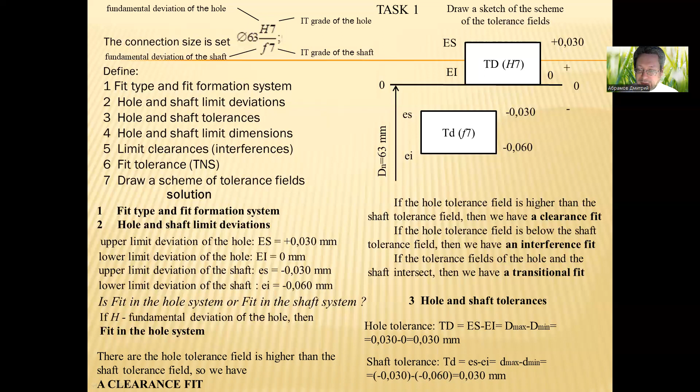Hole and shaft tolerances. Hole tolerance, big TD, equals upper limit deviation minus lower limit deviation of the hole: 0.03 minus 0 equals 0.03 millimeters. Shaft tolerance, TD small, equals upper limit deviation of the shaft minus lower limit deviation of the shaft: minus 0.03 minus minus 0.06, equals 0.03 millimeters.

For hole and shaft limit dimensions: maximum hole size, D maximum, equals nominal diameter plus upper limit deviation of the hole: 63 plus 0.03 equals 63.03 millimeters. Minimum hole size equals nominal diameter plus lower limit deviation of the hole: 63 plus 0 equals 63 and 0 millimeters.

Maximum shaft size and minimum shaft size. Maximum shaft size, small d maximum, equals nominal diameter plus upper limit deviation of the shaft: 63 plus minus 0.03 equals 62.97 millimeters. Minimum shaft size, small d minimum, equals nominal diameter plus lower limit deviation: 63 plus minus 0.06 equals 62.94 millimeters.

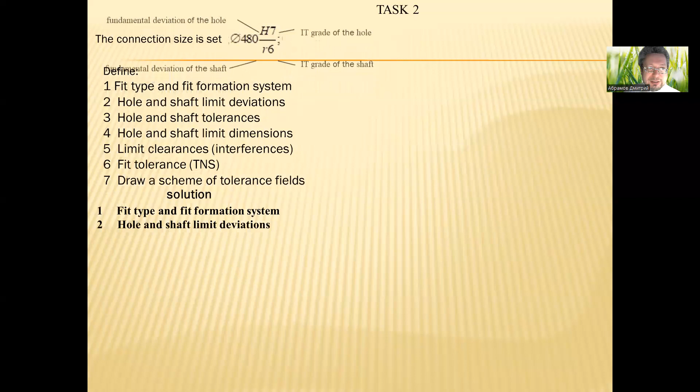We start solution. First, fit type and fit formation system. We have fundamental deviation of the hole, fundamental deviation of the shaft, IT grade of the hole, and IT grade of the shaft. Upper limit deviation of the hole, big ES, is equal plus 0.063 millimeters. Lower limit deviation of the hole, big EI, is equal 0 millimeters.

Upper limit deviation of the shaft, small es, is equal plus 0.172 millimeters. Lower limit deviation of the shaft, small ei, is equal plus 0.132 millimeters.

Is fit in the hole system or fit in the shaft system? If H is the fundamental deviation of the hole, then it's fit in the hole system.

Draw a sketch of the scheme of the tolerance fields. Zero line and nominal diameter is equal 480 millimeters. Tolerance field of the hole H7.

Upper limit deviation and lower limit deviation of the hole, and tolerance field of the shaft. Upper limit deviation of the shaft is bigger than upper limit deviation of the hole, and lower limit deviation of the shaft is bigger than upper limit deviation of the hole.

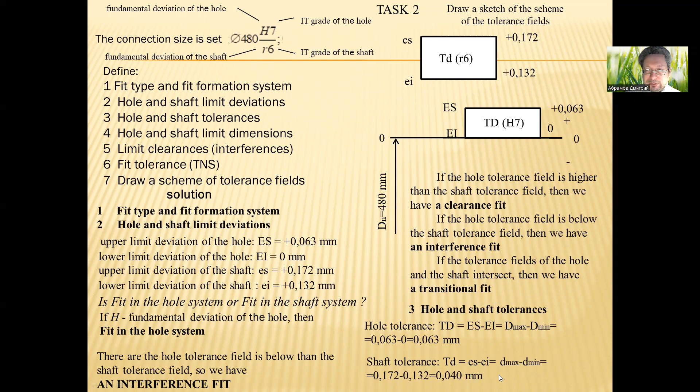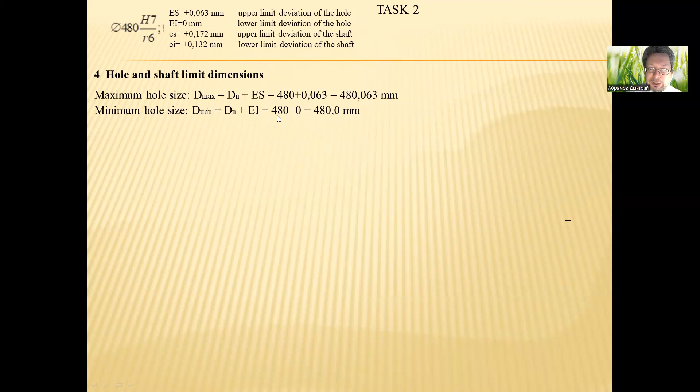We continue task 2. Solution of task 2 for hole and shaft limit dimensions. Maximum hole size, D maximum, is equal to nominal diameter plus upper limit deviation of the hole. Minimum hole size is nominal diameter plus lower limit deviation of the hole. So maximum hole size is equal to 480 plus 0.063, and we have 480.063 millimeters. Minimum hole size is equal to 480 plus 0, which is equal to 480 millimeters.

Maximum shaft size, small d suffix maximum, is equal to nominal diameter plus upper limit deviation of the shaft. It's equal to 480 plus 0.172, so we have 480.172 millimeters. Minimum shaft size, d suffix minimum, is nominal diameter plus lower limit deviation of the shaft: 480 plus 0.132, so we have 480.132 millimeters.

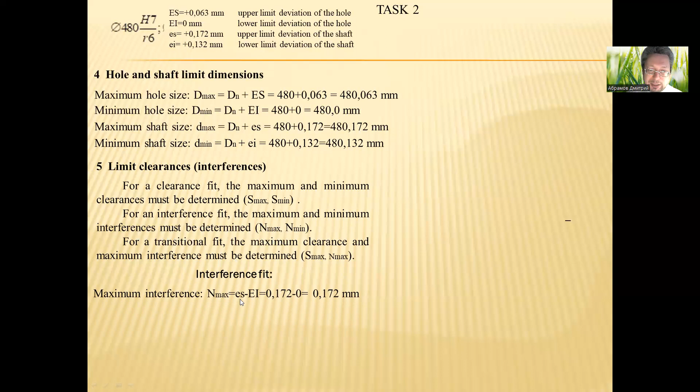Limit clearances or interferences. We have interference fit. For an interference fit, the maximum and minimum interferences must be determined. Maximum interference is equal to upper limit deviation of the shaft minus lower limit deviation of the hole, and we have 0.172 minus 0, which is equal to 0.172 millimeters.

Minimum interference: we have lower limit deviation of the shaft minus upper limit deviation of the hole, which is equal to 0.132 minus 0.063, equal to 0.069 millimeters. Fit tolerance is the sum of the tolerance field of the hole and tolerance field of the shaft, big TD plus TD small, and we have 0.063 plus 0.040, which equals 0.103 millimeters.

Draw a scheme of tolerance fields. Zero line, nominal diameter of connection is 480 millimeters. Tolerance field of the hole, tolerance field of the shaft, upper limit deviation of the shaft, lower limit deviation of the shaft, upper limit deviation of the hole, lower limit deviation of the hole. R6 is the tolerance field of the shaft, and H7 is the tolerance field of the hole.

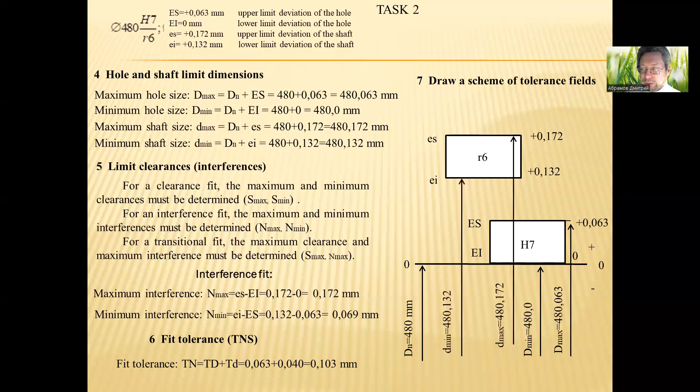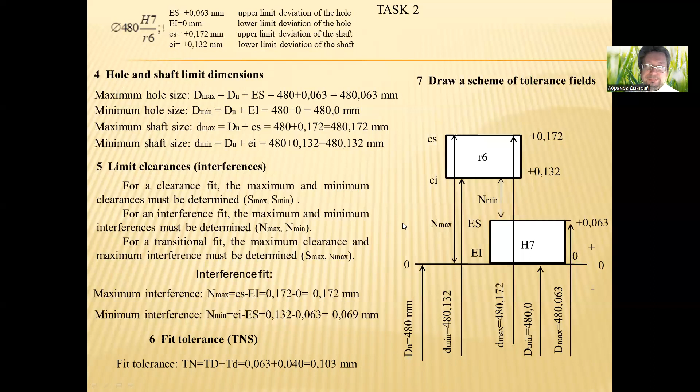Limit dimensions of the hole, limit dimensions of the shaft, and maximum interference and minimum interference in the fit. It was solution of task number 2.

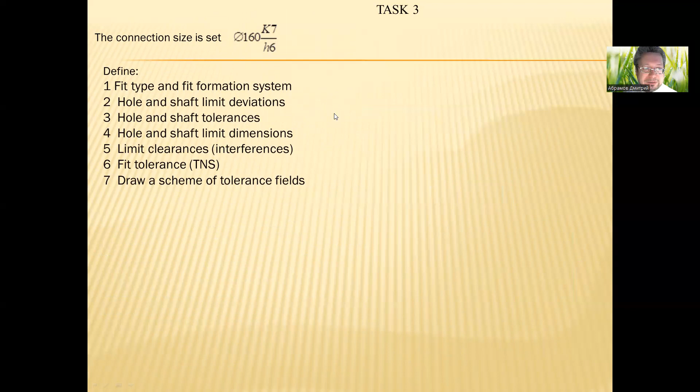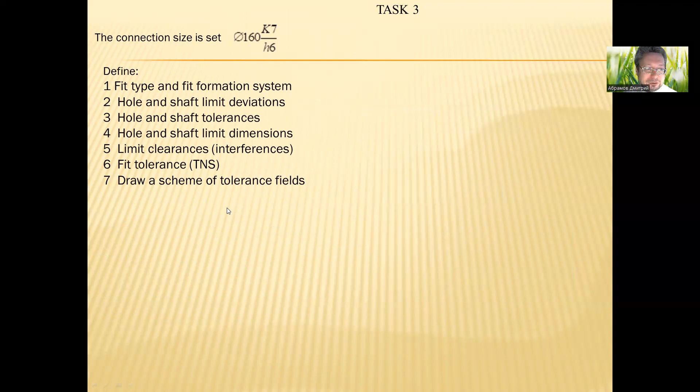Task number 3. The connection size is set: nominal diameter 160 millimeters, K7, line H6. Define fit type and fit formation system, hole and shaft limit deviations, hole and shaft tolerances, hole and shaft limit dimensions, limit clearances, interferences, fit tolerance, and draw a scheme of tolerance fields.

We start solution. First, fit type and fit formation system, hole and shaft limit deviations. Fundamental deviation of the hole K, IT grade of the hole 7, fundamental deviation of the shaft H, small h, and IT grade of the shaft 6.

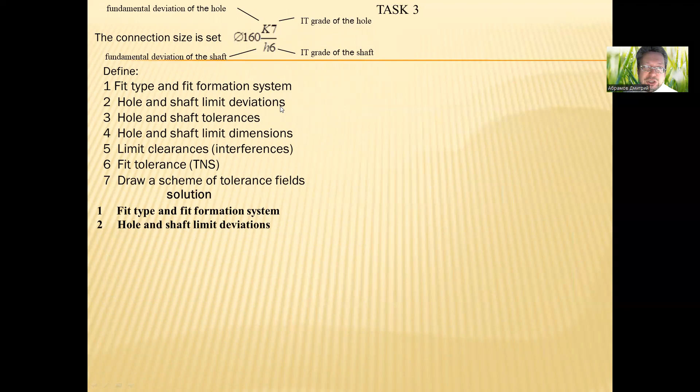We find upper limit deviation of the hole, big ES, is equal plus 0.012 millimeters. Lower limit deviation of the hole, big EI, is equal minus 0.028 millimeters. Upper limit deviation of the shaft, small es, is equal 0, and lower limit deviation of the shaft, small ei, is equal minus 0.025 millimeters. Is fit in the hole system or fit in the shaft system?

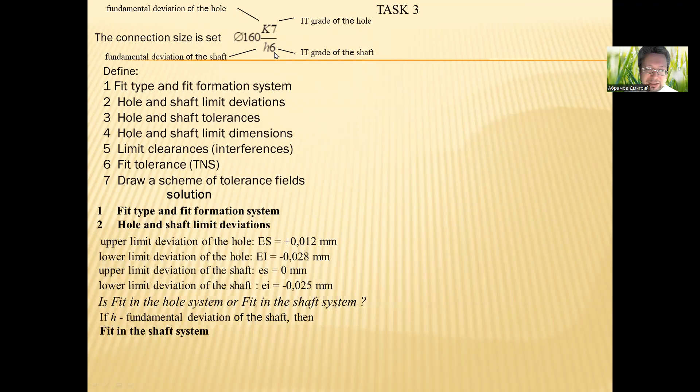If H is fundamental deviation of the shaft, then fit in the shaft system. We have H fundamental deviation of the shaft, so we have fit in the shaft system.

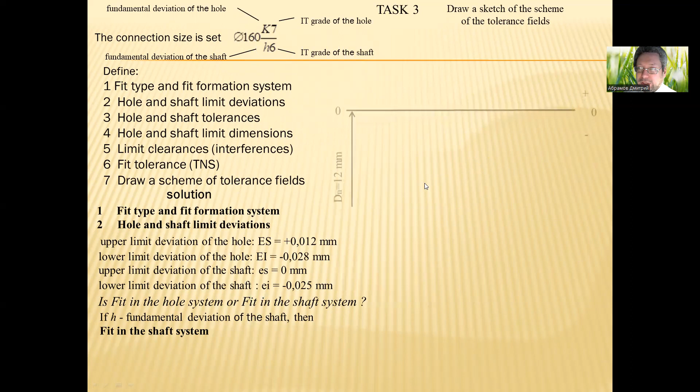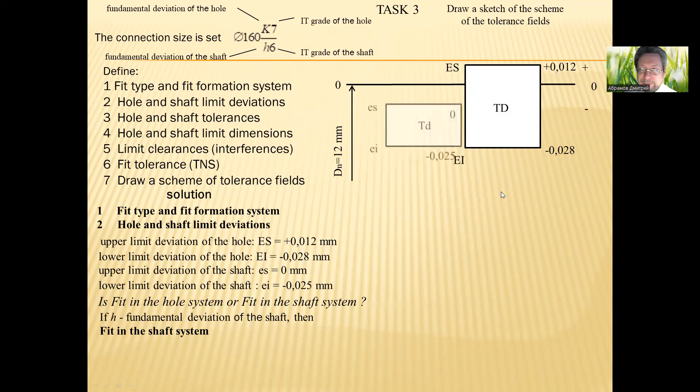Draw a sketch of the scheme of the tolerance field. Zero line, nominal diameter, tolerance field of the hole. Upper limit deviation is equal plus 0.012. Lower limit deviation of the hole minus 0.028 millimeters. And tolerance field of the shaft: small es is equal 0, small ei is equal minus 0.025.

If the tolerance field of the hole and the tolerance field of the shaft intersect, then we have a transitional fit. So the tolerance fields of the hole and shaft intersect, so we have a transitional fit. Hole and shaft tolerances.

Hole tolerance is upper limit deviation of the hole minus lower limit deviation of the hole. 0.012 minus minus 0.028, it's equal 0.04 millimeters. Shaft tolerance, T small d, is equal upper limit deviation of the shaft minus lower limit deviation of the shaft.

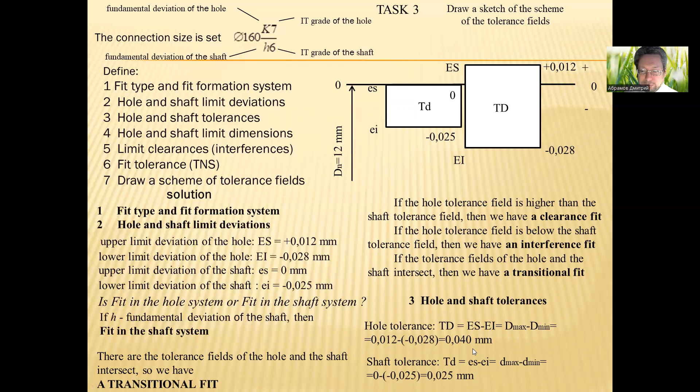And we have 0 minus minus 0.025 millimeters.

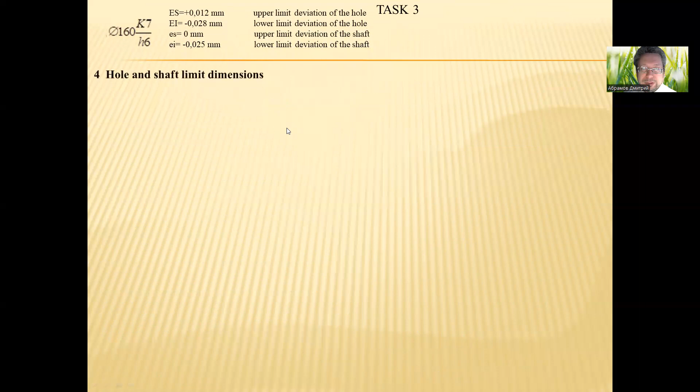And we continue solution of task number 3. For item 4, hole and shaft limit dimensions.

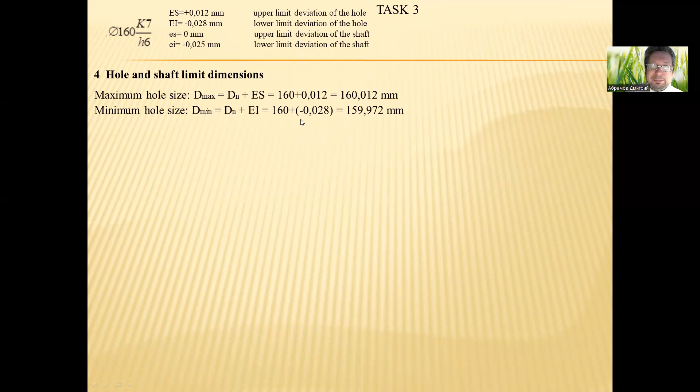Maximum hole size, D maximum, is equal nominal diameter plus big ES. We have 160 plus 0.012, and it's equal 160.012 millimeters. Minimum hole size, nominal diameter plus lower limit deviation of the hole: 160 plus minus 0.028, and we have 159.972 millimeters.

159.972 millimeters. Maximum shaft size, D suffix maximum, we have nominal diameter plus upper limit deviation of the shaft: 160 plus 0, and we have 160 millimeters.

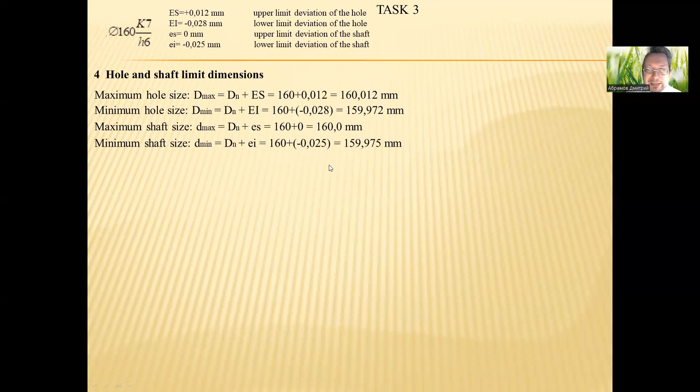Minimum shaft size, D minimum, we have nominal diameter plus lower limit deviation of the shaft, and we have 160 plus minus 0.025 millimeters. It's equal 159.975 millimeters. Limit clearances or interferences.

For transition fit, the maximum clearance and maximum interference must be determined. We have transition fit, maximum clearance, S suffix maximum, is equal upper limit deviation of the hole minus lower limit deviation of the shaft. We have 0.012 minus minus 0.025, it's equal 0.037 millimeters. Maximum interference is equal small es minus big EI.

It's upper limit deviation of the shaft minus lower limit deviation of the hole. We have 0 minus minus 0.028, it's equal 0.028 millimeters.

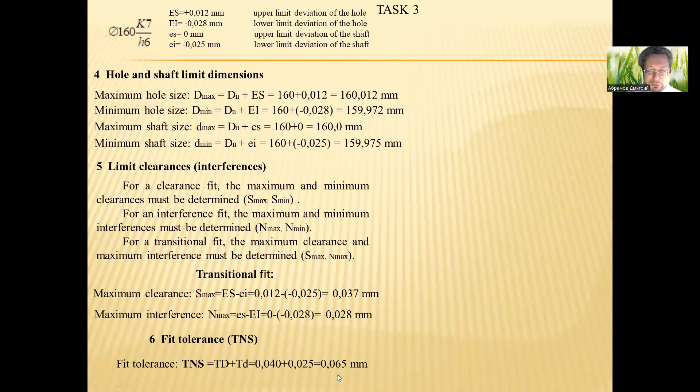Fit tolerance. Fit tolerance is equal tolerance field of the hole plus tolerance field of the shaft. 0.04 plus 0.025, and we have 0.065 millimeters.

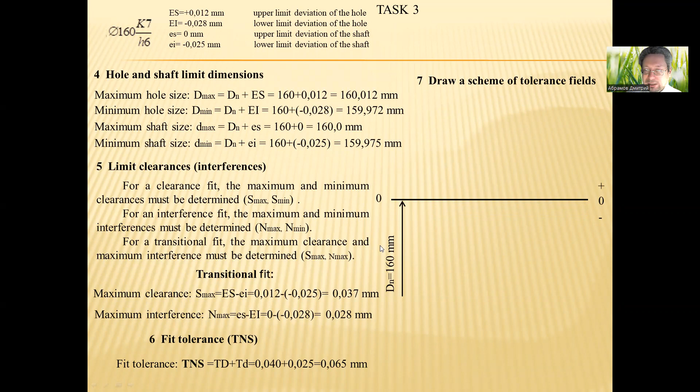And now we draw a scheme of tolerance field. Zero line, nominal diameter is equal 160 millimeters. Tolerance field of the hole, upper limit deviation 0, lower limit deviation minus 0.025 millimeters.

Tolerance field of the shaft, excuse me, it was tolerance field of the shaft, TD small, upper limit deviation of the shaft. It's fit in the shaft system, so first it's tolerance field of the shaft.

Upper limit deviation small es is equal 0. Lower limit deviation small ei is equal minus 0.025. And tolerance field of the hole, big ES, upper limit deviation of the hole is equal plus 0.012, and lower limit deviation of the hole minus 0.028 millimeters.

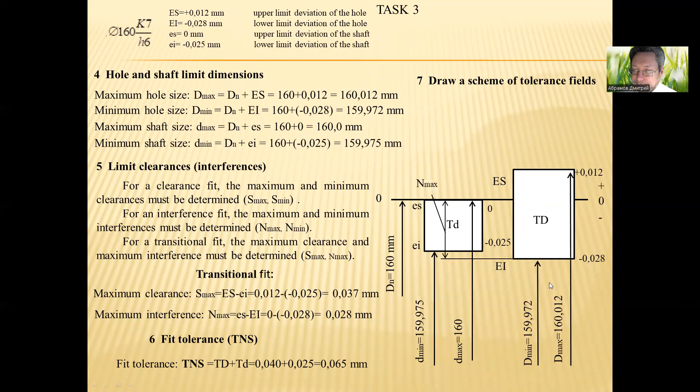Its limit dimensions of the shaft and limit dimensions of the hole. Maximum interference in the fit and maximum clearance in the fit.